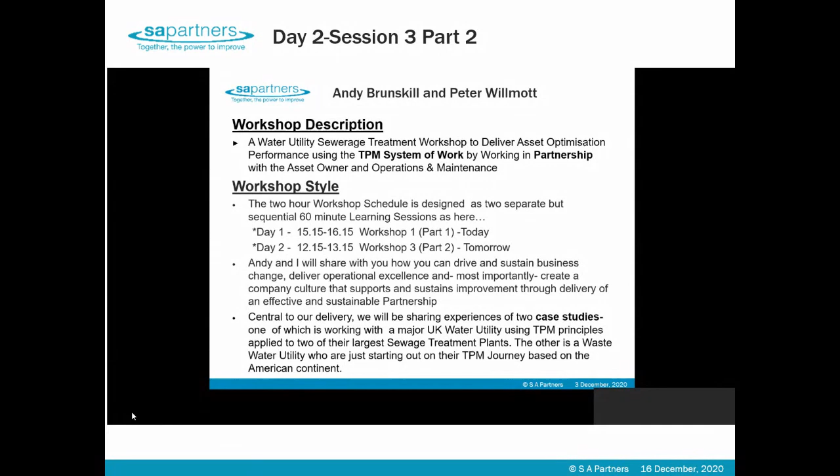This was our agenda over the two days. Let's highlight today's session, day two, where following this brief introduction, we're going to spend about 20 minutes digging deeper into the wastewater utilities case studies.

Then, most importantly, we're going to focus on a further 20 minutes of the hour looking at how you can set about scoping your TPM program in a particular facility, and how you then build in the second part of that session into the key stakeholder buy-in session to the scoping study outputs.

We'll spend the last 6 minutes or so looking at the second exercise of how you align your strategic business drivers, as a takeaway exercise.

We did one yesterday, as those of you who were there know, and we're going to do a second one. Then that leaves us 5 to 7 minutes at the end to look at today's key learning points, final thoughts, and an evaluation of what the workshop has given us.

I'm Rhodri Williams, I'm the operator. I've been working alongside the lean team, and as part of my green belt, we've been doing the GBT belts here at Cog Moors.

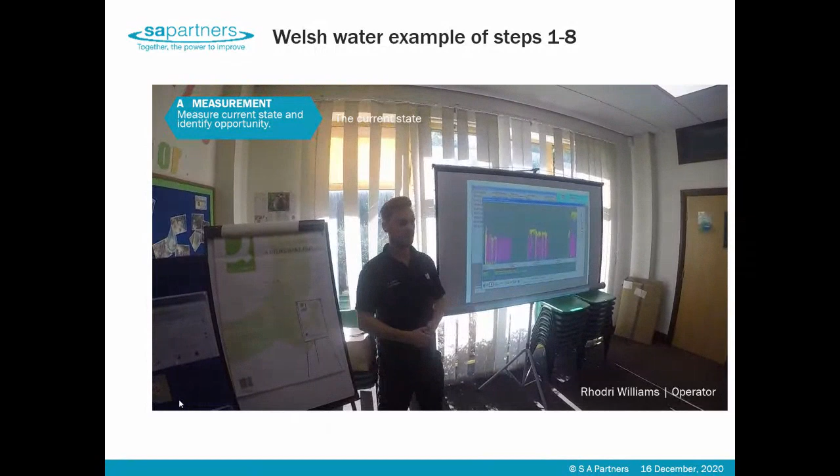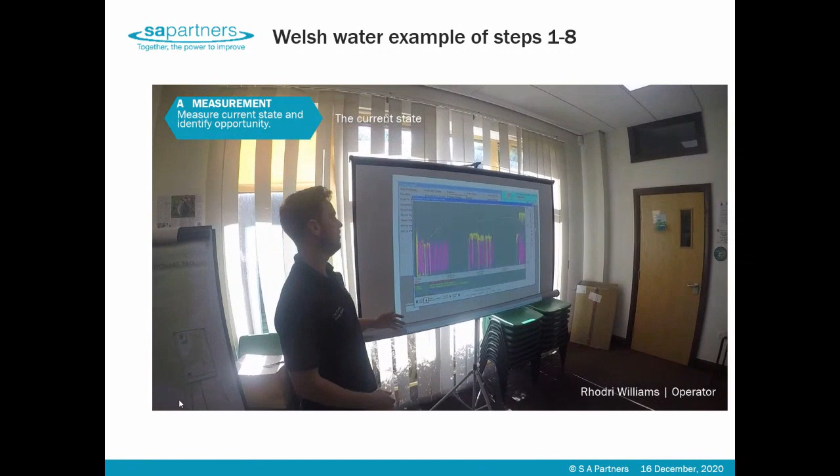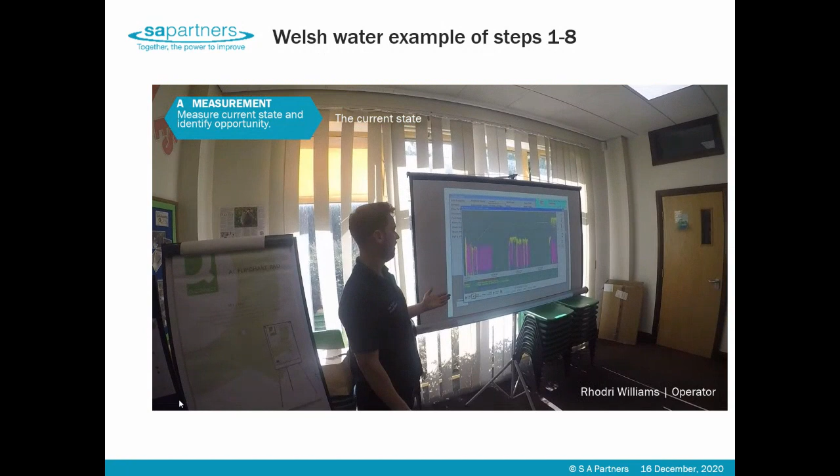The yellow lines are the flow to our thickeners, and the pink lines are the sludge coming over from our primary tanks, which feeds the primary sludge holding tanks. In the previous state, as soon as there's a failure, you see the flow to the GBT stops.

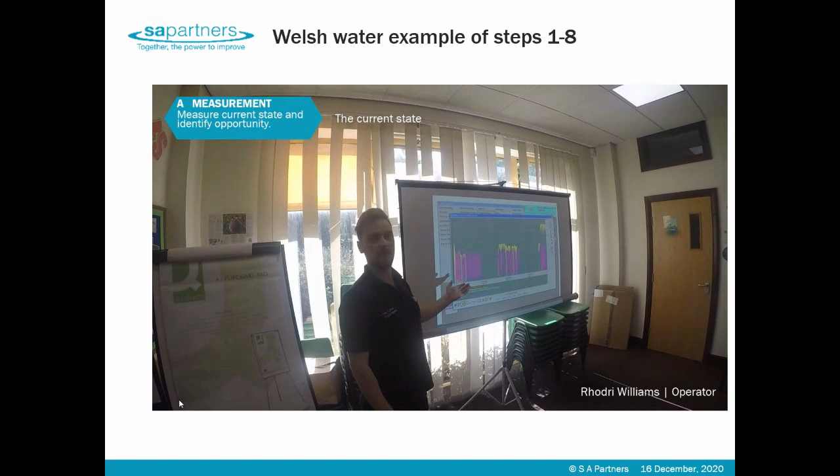As soon as that stops, the tanks fill up. Once the tanks are full, which is the top line up there, it turns the SDM pumps off. While the SDM pumps are off, the sludge is just constantly thickening up in the primary tanks.

We hope to get sludge going onto our belts at about 1.5%. But during a time like this, where the sludge isn't being taken out of the primary tanks due to GBT failures, it's been up over the 4% mark. When it's that high, you can't get it over the belt, so tankers have to come on site.

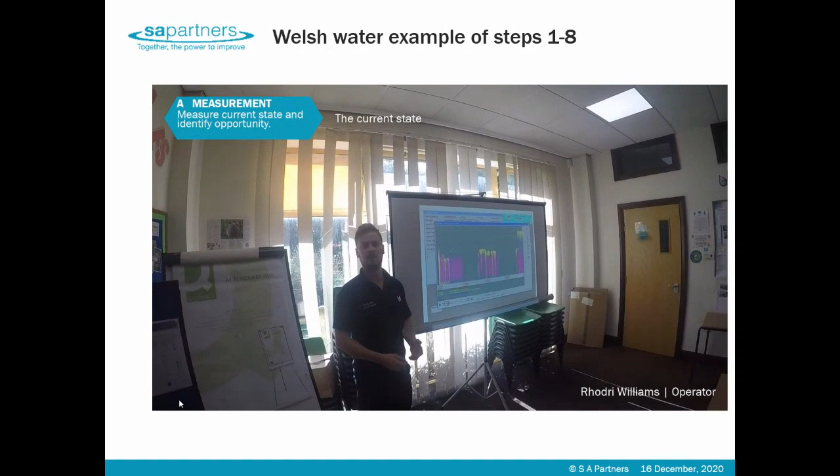I think it's about £1,000 a day. Sometimes we have 2 or 3 tankers going out constantly throughout the day, so it's a large cost.

You can see when we do get the belts up and running again, we might only be up for a few hours, and what happens is we'll leave site after finishing the day's work thinking we've got it sorted. As soon as we leave, the GBTs will fail and the tanks will be full again.

Same process - the sludge will be thickening up in the primary tanks, and coming the next day, first thing in the morning, we'll have issues, and again tankers will have to be called in.

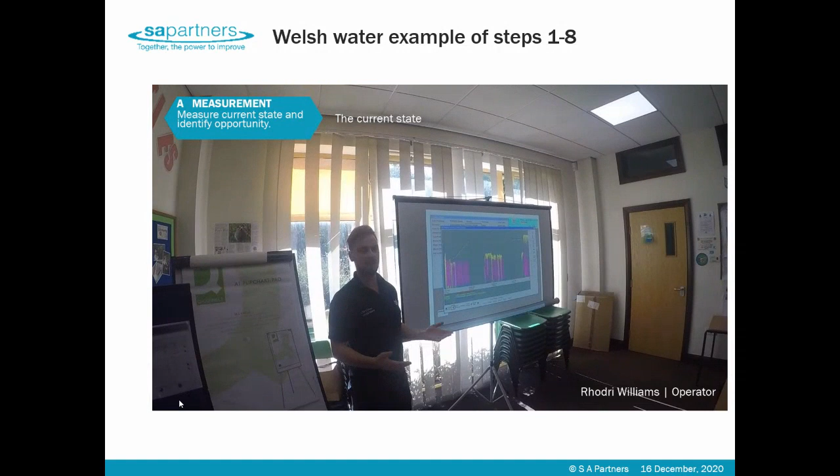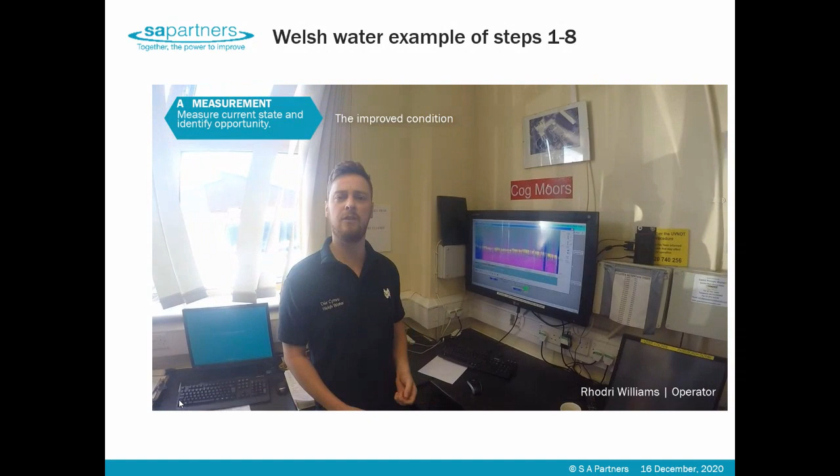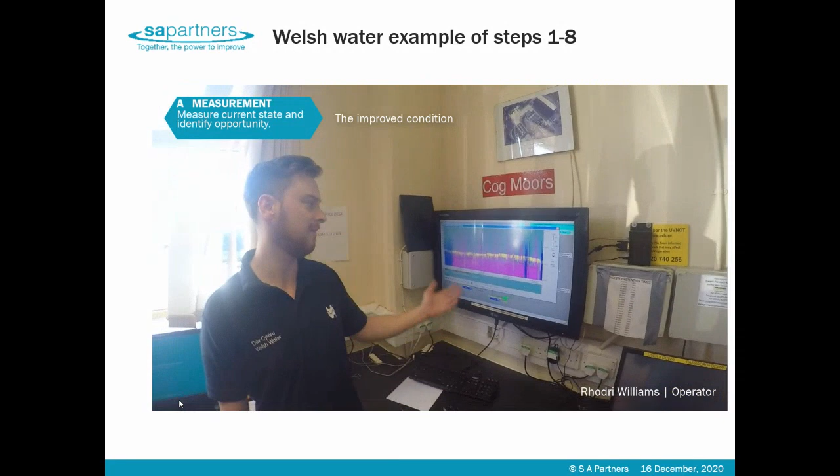So we're currently in the control room here at Cog Moors, looking at current state after a few weeks of running our project. As you can see by the trends, this is live over the past 7 days. We've had constant levels in the tanks, with minor adjustments where the tanks fill up slowly since we haven't been beating it. We adjusted maybe 1 litre and brought it back over a few days instead of running things at 100%, just slowly chipping it down with minor adjustments here and there. We've gone a whole week without breakdown, which was unheard of previously. I think things are looking a lot better, and we just hope it'll carry on.

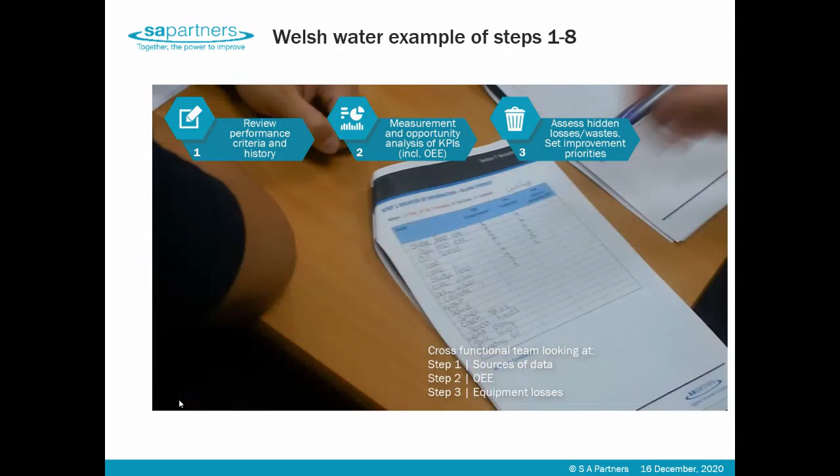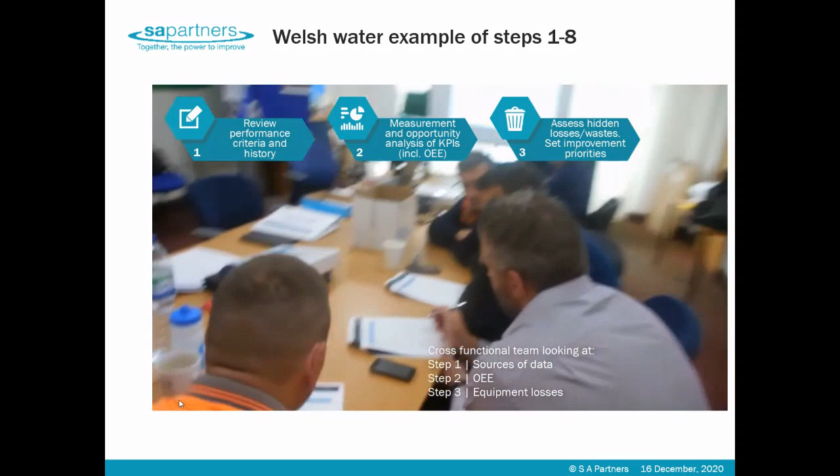Yeah, so that's what you then get before. Yeah, so starting off with, in an ideal situation you can have 3 belts up and running, so if there's any breakdown you can just jump onto the next one. But no.

Hopefully this doesn't work towards the transfer pump? Yeah, transfer pump, where that would have been used.

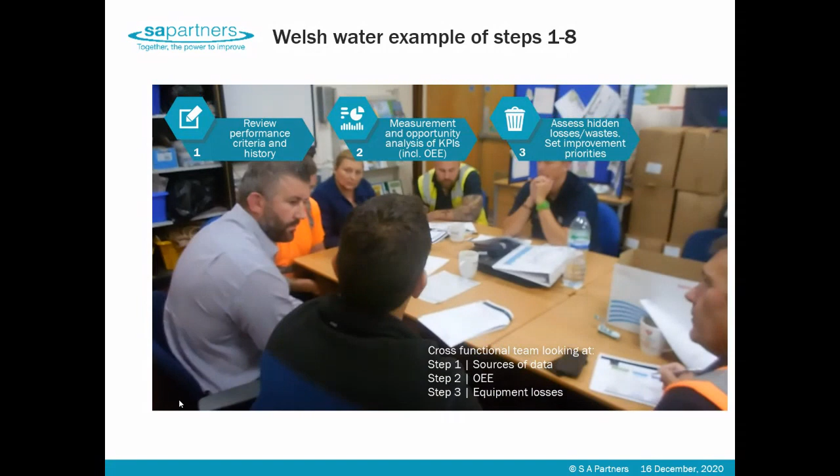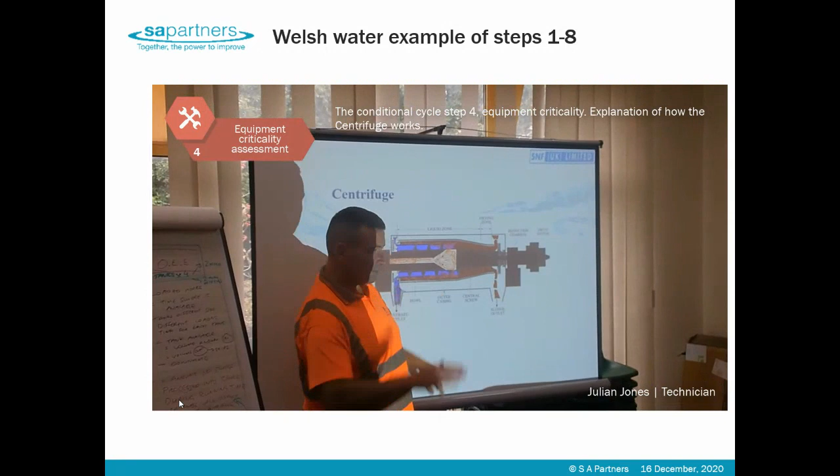The solids come over here, and the centrate comes at the back end.

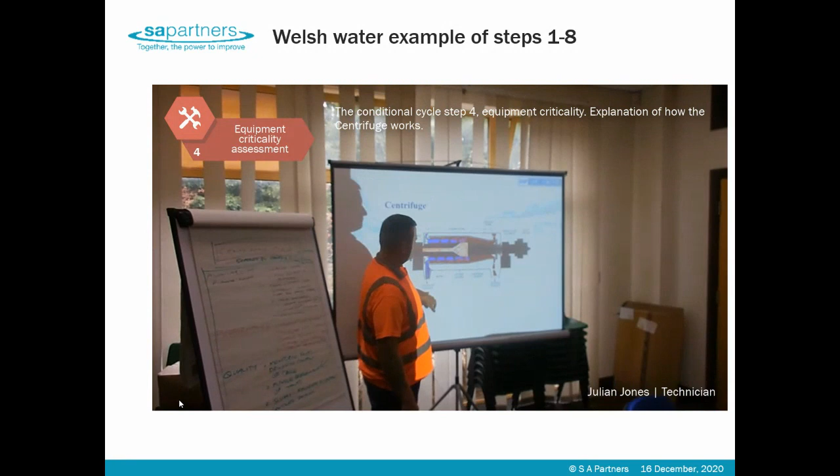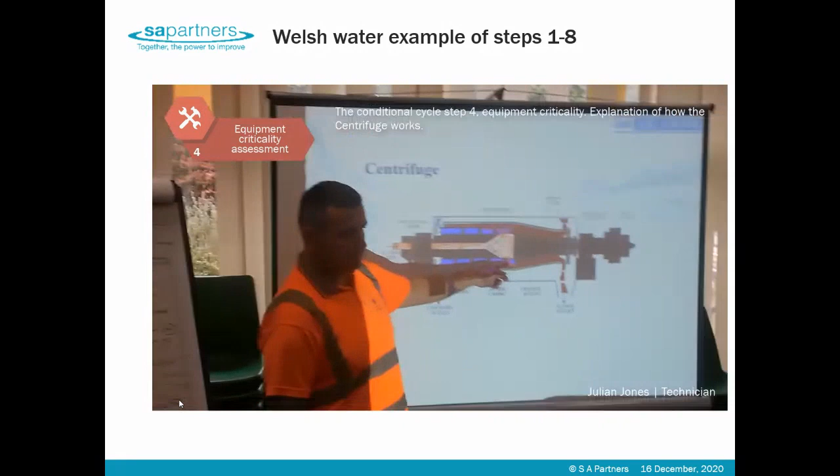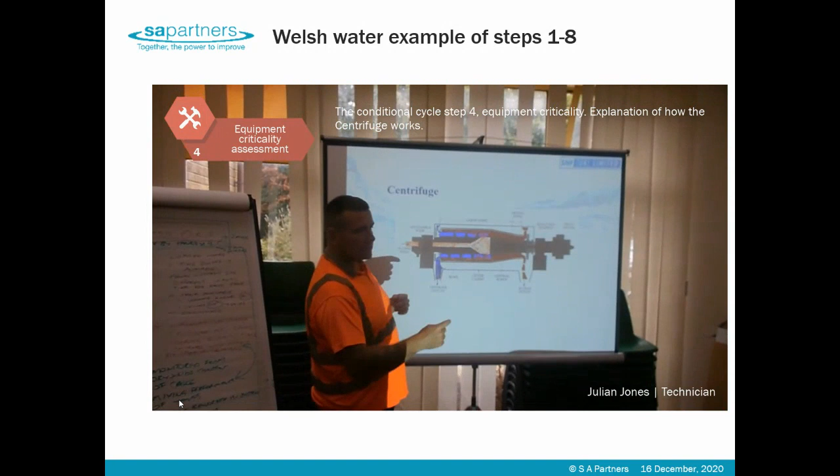So what types of issues do you have with those in particular? Yes - block ports along here, not so much block ports here, but where the scroll is welded into the shaft, there are supposed to be slots that fill up with rag, causing imbalance, and fill up with grit. The ports where the sludge comes out and the centrate comes out get blocked with rag and grit, causing imbalance again. Also, if you make it too dry and overfeed it, it can't get out quick enough. Right, so that's what was happening previously - shoving so much in, it can't get out quick enough. And there's a problem with the conveyor too, isn't there, taking it away? It drops down onto a conveyor which takes it away, but that couldn't move it quick enough. And that was backing up then? That would back up and eventually put more strain on the belts.

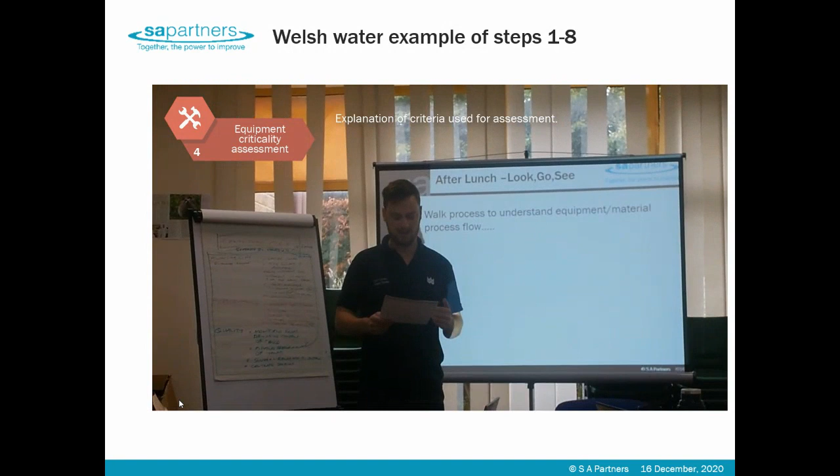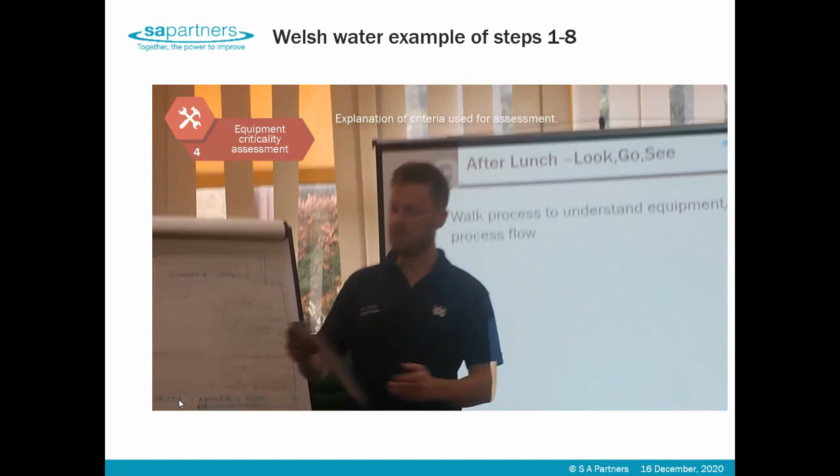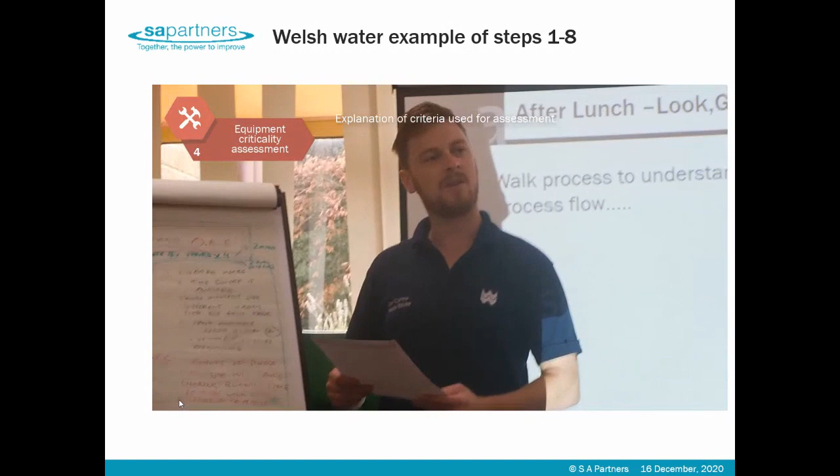Using the criticality assessment, we looked at safety, availability, performance, reliability, maintainability, environment, and cost. Using a form like this, you go through it, and what it does is pick out the worst offender - and it's usually not what you think it is.

It just goes on the floor. The sample point they mentioned was for the drainage - it goes in there but still crosses the path to get to the drain. So look at the drain, it's in the middle of the path, and to get from the sample point to the drain it has to cross the path. So it blocks up. Yeah, because it blocks up. So should we just leave it open?

Just to help you visualize the process here, we have some photos from the start of the TPM journey of the polymer feed area and the gravity belt thickener. You can see the current state of the polymer dosing area, the spillage on the floor, and the number of near misses and accidents as a result of these spillages. The surface is very slippy, and the polymer is leaking from the IBC bag.

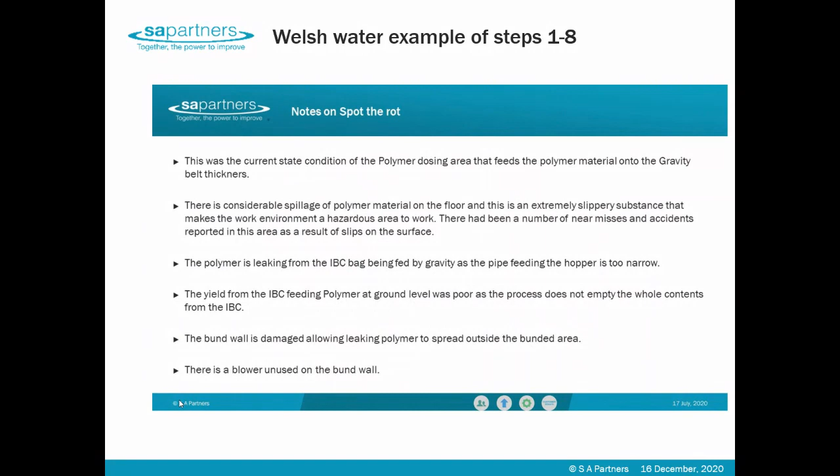The yield from the IBC feeding the polymer at ground level was poor. Here we have the after photos, and here you can see 20 weeks later, a much improved environment.

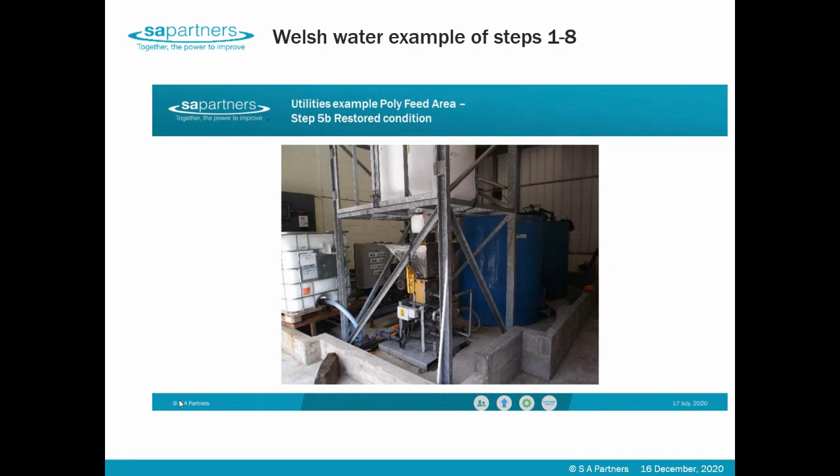The poly spills have been eliminated. The leaks eliminated by changing the diameter. The yield from the IBC bags on the polymer is improved as the IBC bag is now on an incline and empties the whole contents.

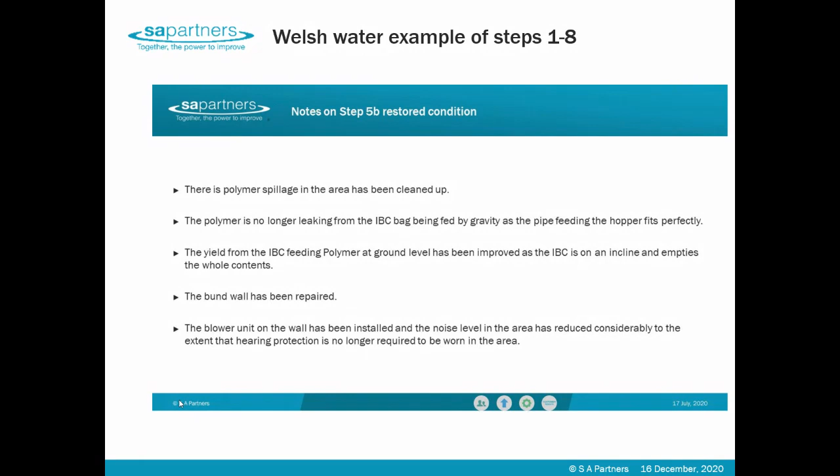The bund wall has been repaired and the blower unit that was previously on the floor has been installed, and the noise level has been reduced considerably to the extent that hearing protection is no longer needed.

So if we just run through the activity board then, we started off on day one looking at the sources of information. So we've got quite a lot of sources of information there. We've looked at how trustworthy the information is, and actually quite pleasingly, we don't have anything there below a 3, so that's pretty good. And we've got quite a lot of 4s and 5s, which means that the quality of the information is very good or excellent.

So that's a good starting place for getting our background data and how it's operating. We could do with some more information on schematics. I think really to look at some of the criticalities further on, we really do need to break down that schematic. So somebody needs to go away and find that schematic.

I'm looking at Roger here now. Have a word with Sean and see if we can find the detailed schematic for the centrifuge and for any other bits of equipment within the area that are quite crucial to this. I don't know whether there might be schematics for poly makeup and that sort of thing as well.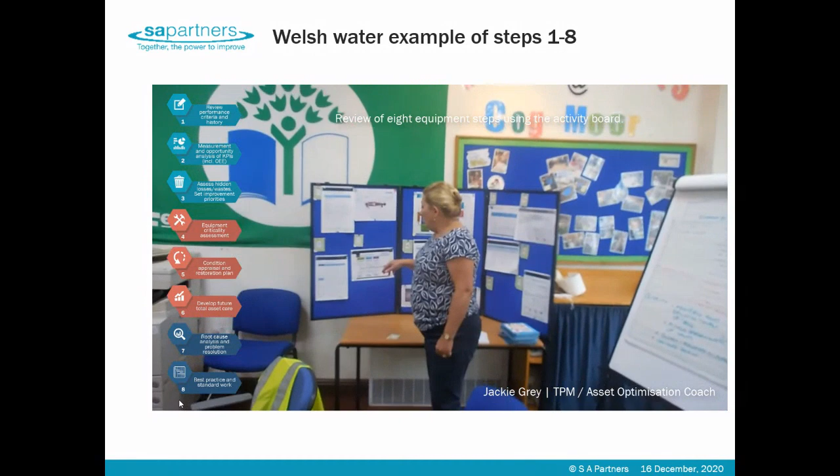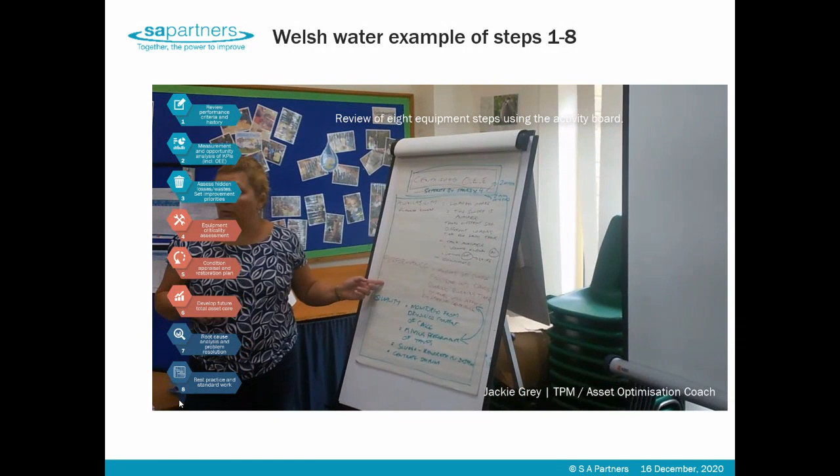Okay, so we did some really good work on the OEE. This is really good. We do need to put a lot of thought into how we calculate this so it means something to us, and so that we can come up with a template that actually reflects what we're going to do in the other parts of the business when we roll this out. So it's really important that we get this right and we make it meaningful.

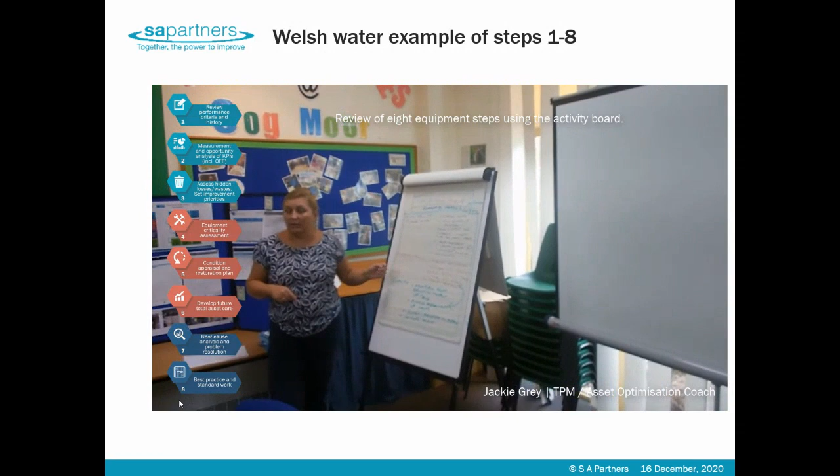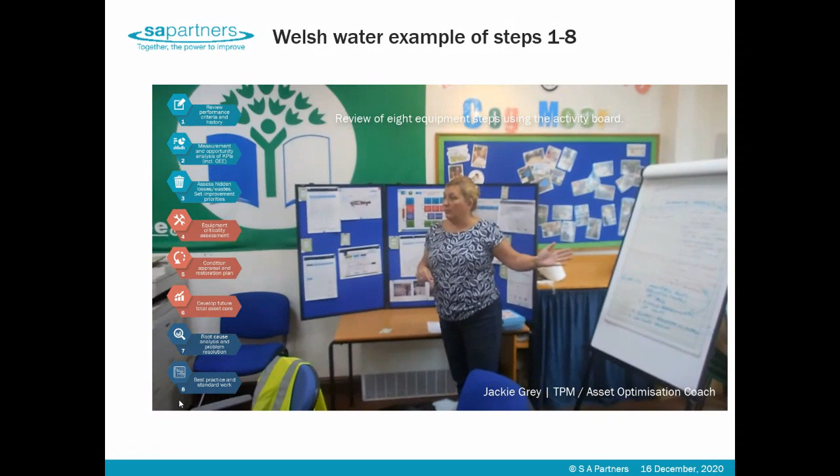So I know you're going to review that now, and we'll have a look at that when we see you next Thursday, won't we? And we'll try and work that template. And then we'll probably put 4 weeks of data into it and see what it looks like, and then review it again as a group and work with it for a few weeks to see if we're happy with how we're calculating it. Okay? And we'll be doing that on the GBT figures first, and then we'll try it on the centrifuge figures, but we'll do GBTs to trial it, okay?

So we looked at the losses in stage 3, and that gives the basis to see where we can find some of the wastes within the process and where we can make improvements.

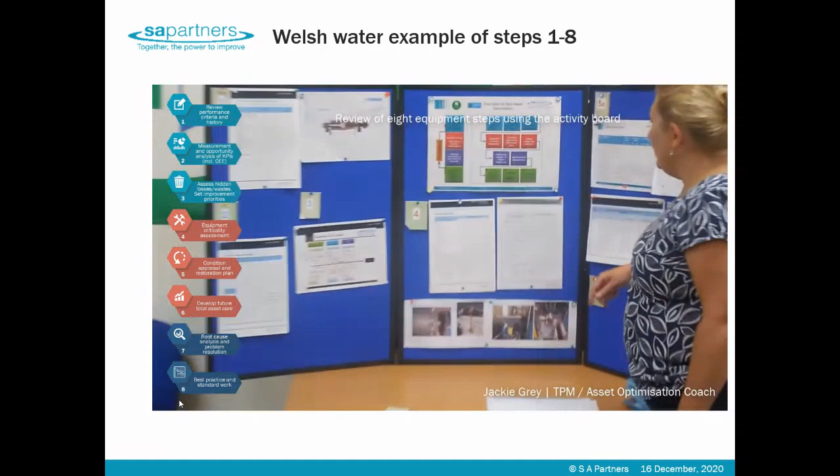And then we went on to criticality assessment. The criticality assessment is pretty detailed, really pleased with that. We get some quite high scores on there, so maybe the poly system, I think there's quite a lot of work that can be done with that.

And Matt very kindly said that he would look into finding what we could have in a way of a self-contained poly unit and looking at the cost of that, because there may be some funding available, especially if it is a mobile unit that if we have changes to the site we could utilise elsewhere. I think we've got more credibility for actually having it in the short term if it's a mobile unit that could be utilised elsewhere on other sites.

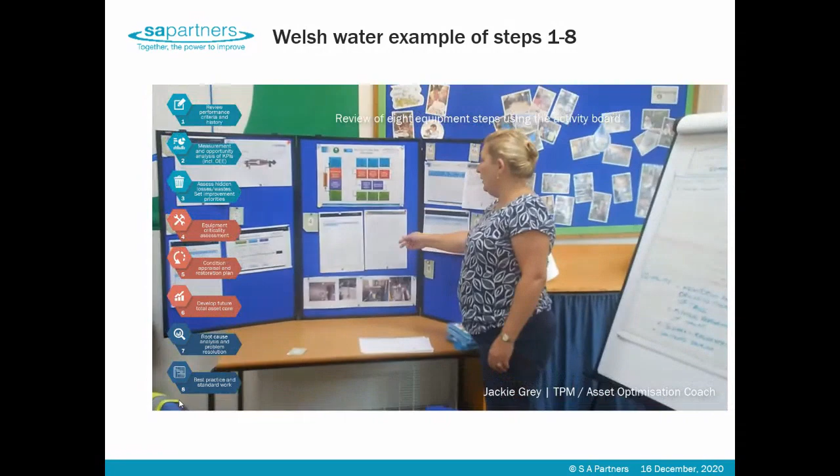I'd rather we focused on finishing the asset optimisation on the GBTs first. But if there is something in there that while you're doing repair, you've got to clear it up anyway, or you've got something that you could do at the same time, obviously try and pick up the quick wins in there as we go along.

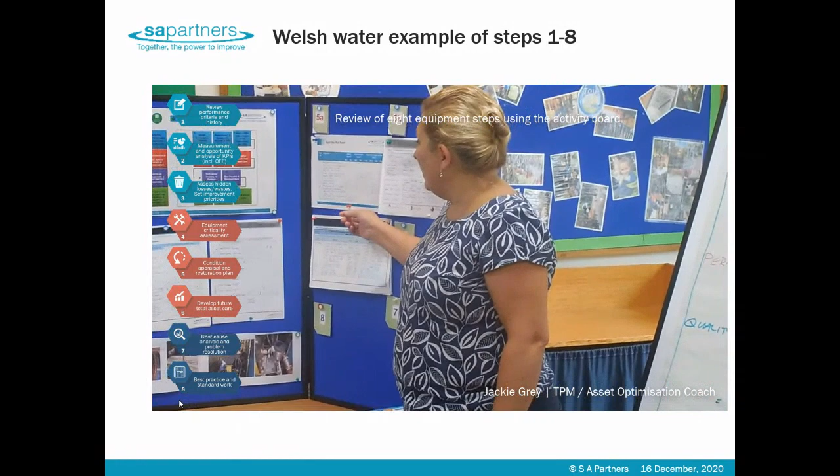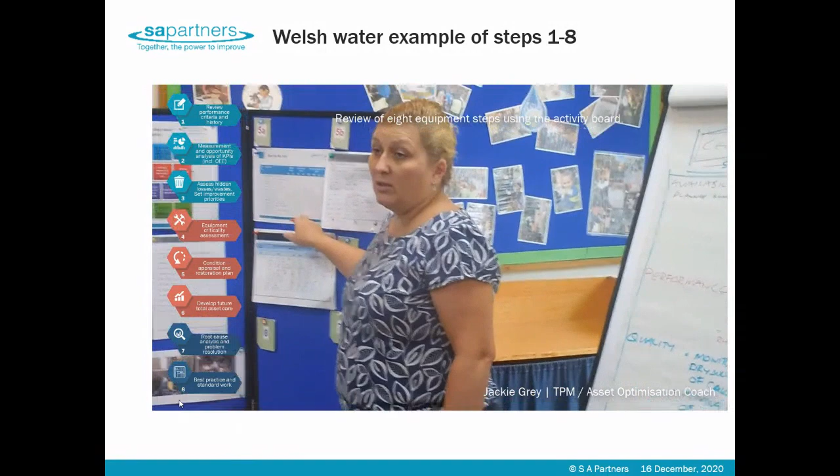There's quite a bit of work in there to get that right. We'll have a Tidy Tuesday, hopefully next Tuesday, maybe make a start on that. It's not literally a quick half hour in the GBT area to get it back to as it was, and there's a few boxes in there that could do with getting back to the state it was. But that's more than one Tidy Tuesday there - with a few bodies in there, we might be able to make an impact on it.

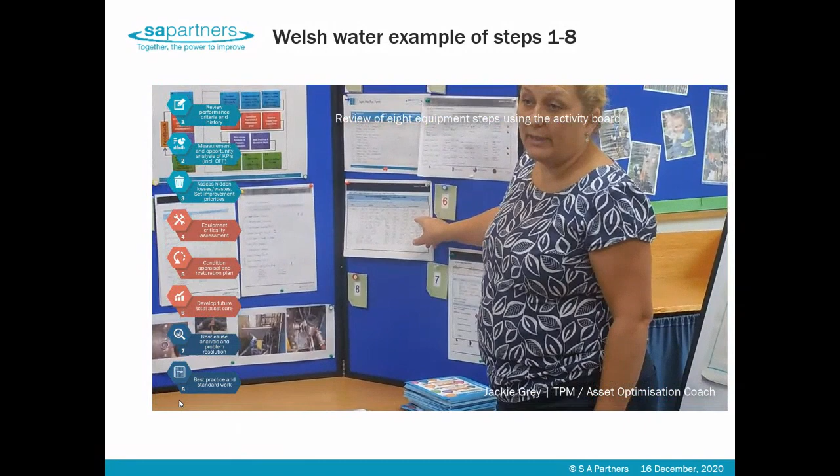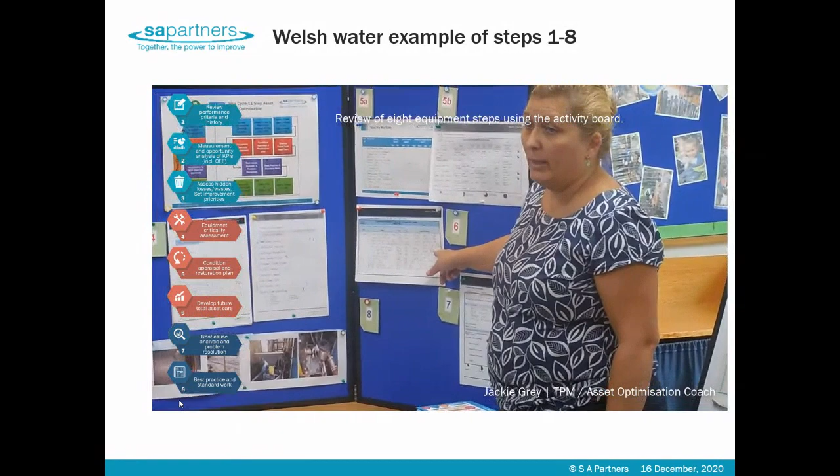We've also gone on to the total asset care. There's lots of checks that could be done, and some of them are being done, some aren't. These are the things we need to iron out and implement before we get that refurbished centrifuge back into service. As soon as that goes back into service, we need to make sure the asset care we're doing can be controlled to minimise the impact of any breakdowns or blockages as much as we can.

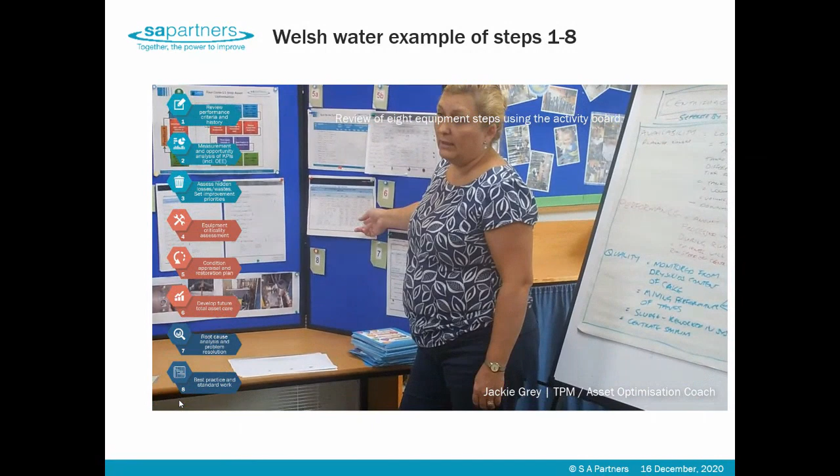Obviously we can't do anything about the rag coming through the system with the strain press, but you've already identified things within this process to minimise the actual blockages - by reducing the flow, keeping it running as much as it can, and by making sure that cleaning cycle is actually run, forcing that cleaning cycle before it all becomes too dry and hard.

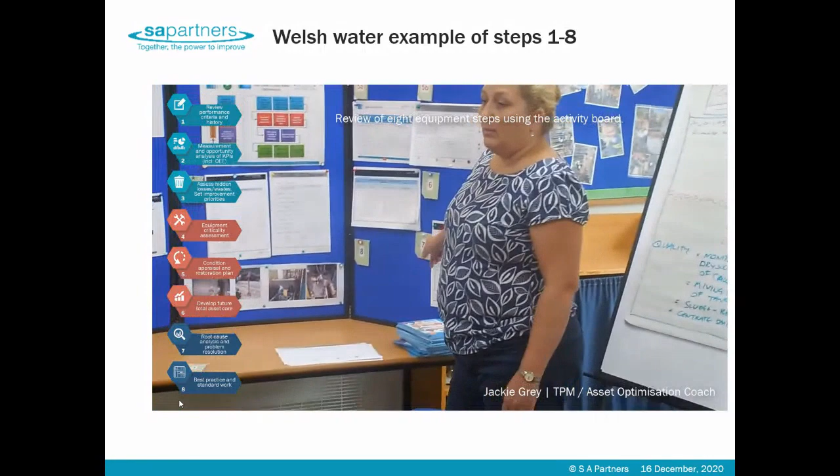Then we went on to the final step, looking at standard operating procedures, and talked about the two types of SOPs. We call them SOPs within the business, but really within this process you've got standard operating asset care, and standard operating procedures, which will cover how you operate the asset to its optimum.

So I think to cut down on the bulk, we should have a quick reference guide. Now we understand how we need to run the GBTs and the centrifuges to the spec they were designed, we have quick reference asset care SOPs, and quick reference asset operation SOPs that say, depending on the thickness coming in and the tank levels, the different ways you run that piece of equipment.

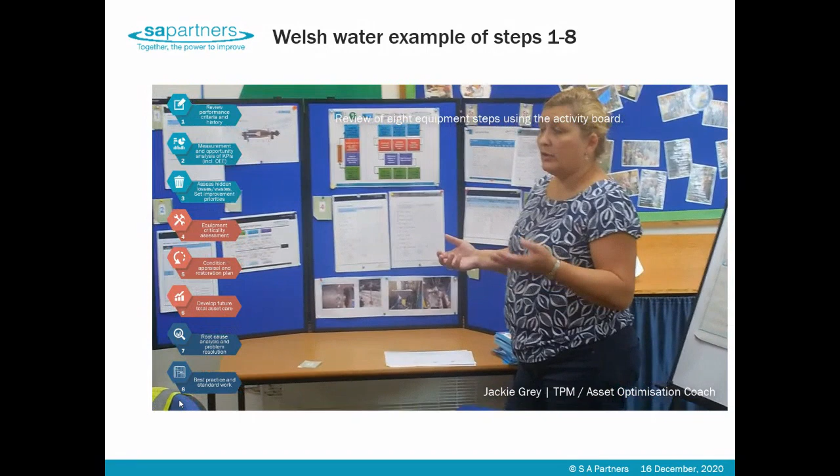From an audit and review process, the team progressively worked through four maturity milestones: introduction, refine best practice and standardise, building capability, and striving for zero losses. There's some audits against each of those - 1A, 1B, 2A, 2B, etc.

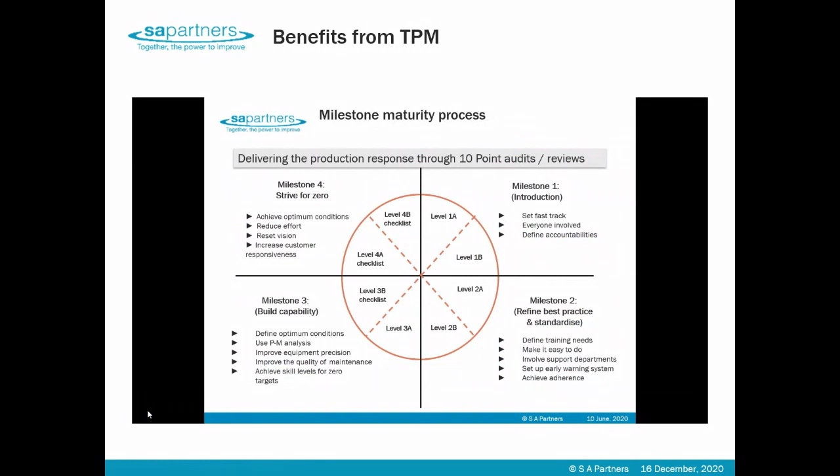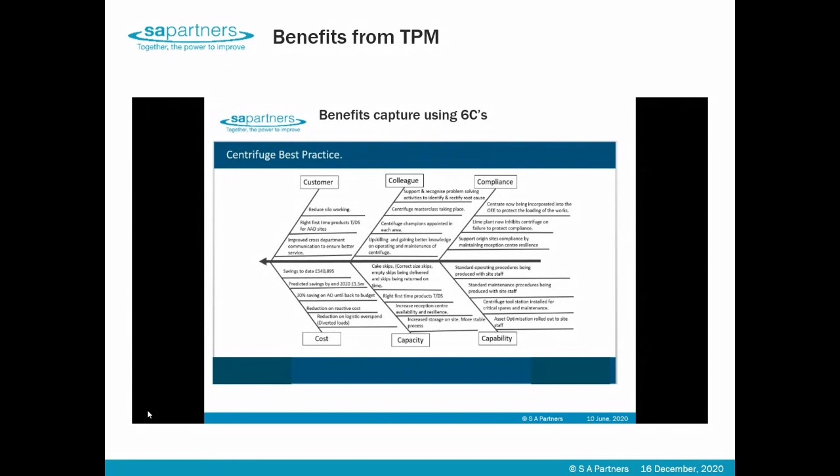One of the other things we've done - this is an example of what the guys have done - is capturing the benefits, using the 6 C's: customer, colleague, compliance, cost, capacity, capability. What are the benefits of the work that's been done? If we look at some of those benefits from a financial point of view, as well as the culture and development of people, this is an interesting one - the benefits of AO and the centrifuges.

Interestingly enough, manual interventions reduced by 15%. Consistent cake, which means basically we've got fewer skips, which is less cost in terms of transport because the cake is at the right specification. Reduced poly consumption in a safer environment.

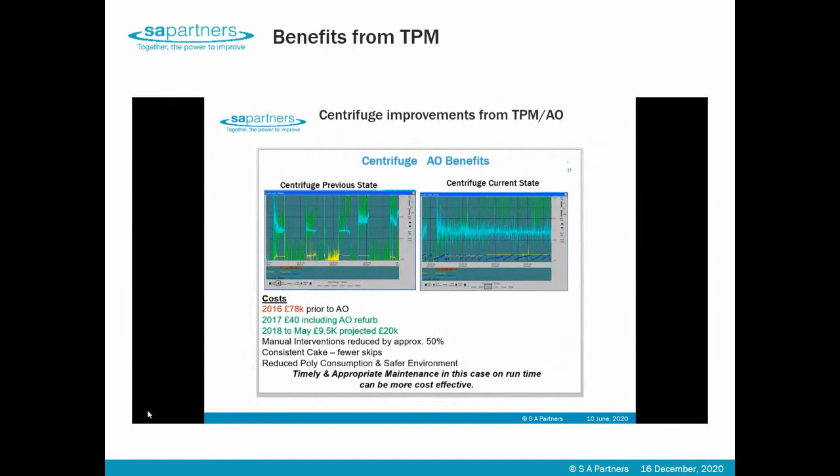And if you translate that - the company's got 47 centrifuges across 30 sites. They set a target of 15k per centrifuge. They've saved 300k to date, and the target is to hit 1.5 million by the end of next year.

If we look at these things called primary settlement tanks, again similar sort of figures - these are the breakdown costs. In 2018, compare that to 15 and 16: 20k, and no breakdowns in the last 22 months, and zero costs for having to bring tankers in to empty the vessels out.

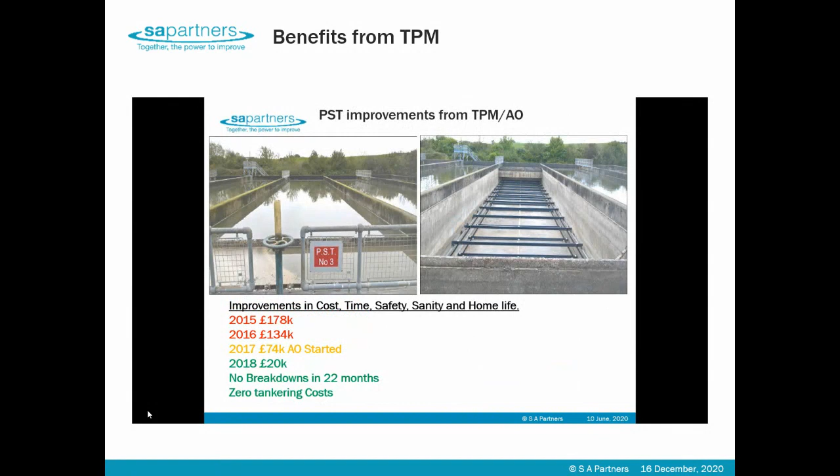And if we look at the belt thickener - improved performance by 33%, running at improved speed, and a 60% improvement in the dry solids. So quite significant results there.

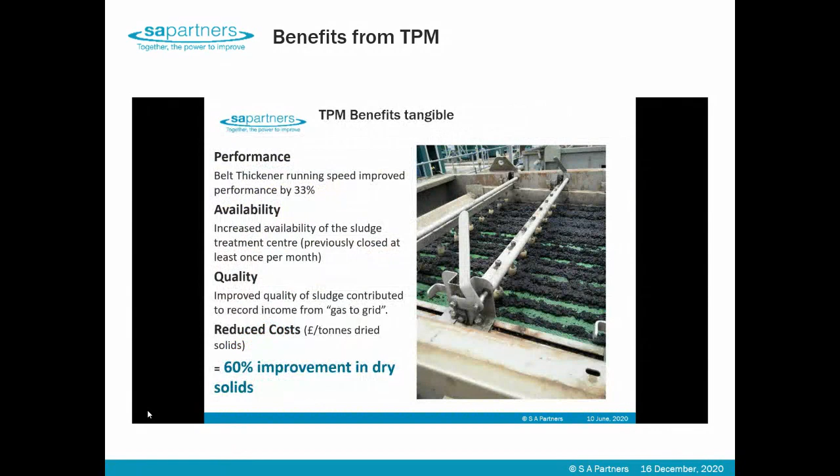We now move on to how we should set about scoping your own TPM program within your water utility and what the implications of that scoping study might be.

We can express TPM as an enabling system and philosophy for delivering operational excellence under the 3 Ps: first, purpose, how customer needs are understood and converted into strategy; second, process, how value is created within the organization; and third, people, how people are trained, upskilled and managed, all focusing on customer results.

Let's look at each in turn. Our systems model of TPM has a purpose, where our program is applied via a defined introductory and deployment process within the utility's business unit. The process is our 11-step model applied through a defined sequence of team-based learning by doing. The outputs of this application are aligned to an evidence-based assessment process linked to the team's progress through our model, the people emphasis.

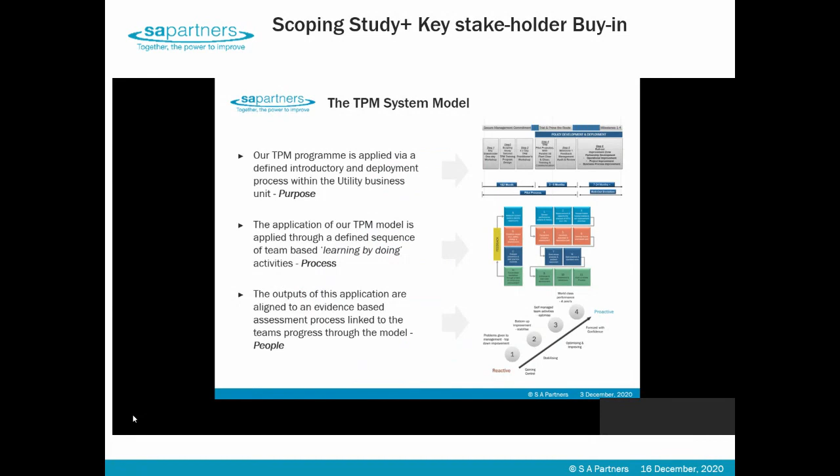Let's look at each in turn. The purpose has 6 steps as a training implementation process. The first 3 steps are concerned with securing management commitment before we then develop the policy and how it's deployed.

By trialing and proving the route across 4 milestones, 1 to 4, comprising steps 4, 5, and 6. The timescales across the bottom are indicative, not absolute, but the first 3 steps of scoping, preparation and tailoring suit our own TPM training program, with the essential step 2 key stakeholder 1-day buy-in session of those scoping study outputs, before we then launch into a 4-day TPM practitioners training workshop.

Those typical timescales across the bottom would take the first couple of months, and then months 3 to 6 could typically be step 4, rolling out or starting on a TPM pilot project and achieving milestone 1, before we go into rollout over the following 2 years and beyond. So there's a pilot process followed by the rollout evolution.

Let's dig deeper into each one of these. Our 4-cycle, 11-step TPM enabling process follows this measurement cycle, condition cycle, problem prevention cycle and sustainment cycle. The first 8 steps, as we explored yesterday, are the equipment-based steps, comprising the measurement, the condition, and the problem prevention and elimination.

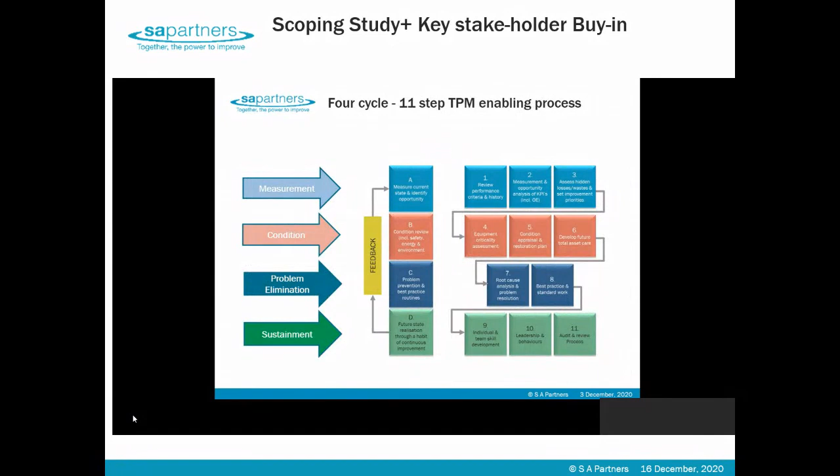And the ownership journey, the people aspects, takes us through 4 levels or 4 milestones, where we move from bottom left, reactive, where we gain control, stabilize our processes in the utility, optimize and then improve those processes so that we can then forecast with confidence and become totally proactive.

Classically, what we find up until milestone 1, problems are given to management with top-down improvement, before the TPM process is able to start and push the bottom-up improvement when we're stabilizing towards self-managed team activities, optimizing, where we can strive to hit the 4 zeros that we set right at the very beginning.

And those 4 zeros are typically zero accidents, because people do not come to work to get injured, zero breakdowns, zero defects, and zero operator interventions, if we want to be truly world-class and be able to forecast the future with confidence.

We also have defined evidence-based audit review criteria at each of those 4 maturity levels, where we move from reactive, proactive, excellent across those 4 levels. And those audit review processes, which are very detailed and evidence-based, are passed over to the local CI TPM teams over an agreed time frame.

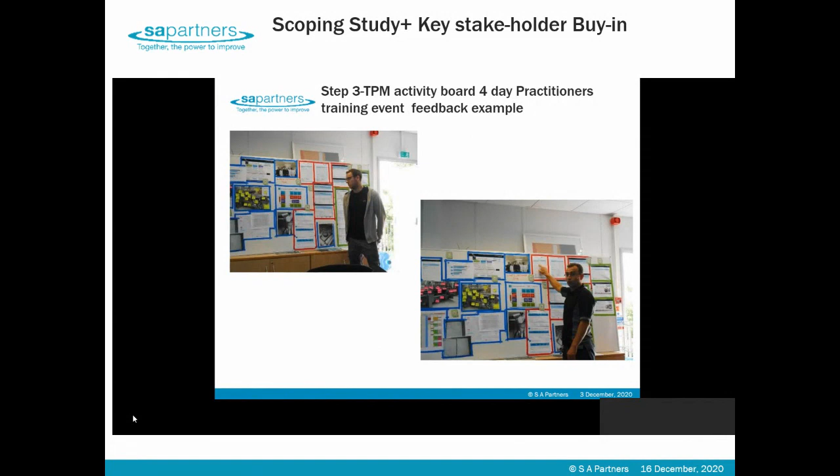So just to summarize that bit and emphasize 4 to 6, having covered the first 3: it's a journey where our capability improves over 2 years minimum, but 3 to 5 years in bigger plants. We go from an initial pilot to improve the process, getting everyone involved to reach milestone 1. Then in milestone 2 we refine the best practices and standardize them, in other words getting the basics right. At milestone 3 we build capability and people become really innovative because we're tapping into their minds of gold. Eventually at milestone 4, those 4 zeros we strive for from the beginning—0 accidents, 0 defects, 0 breakdowns, and 0 interventions—actually become a reality, and we achieve the spark to start vision we set at the very beginning.

What's going on over that period in terms of input, ownership and responsibility is shown in the bottom part, where the TPM facilitators pass over their learned know-how to the maintainers and operators team, working as the asset owners. Supervisors, forepersons and superintendents and managers become coaches, but the manager's real job is as champions—a phrase we'll explain later—and the leadership team is definitely the proactive sponsor of this process.

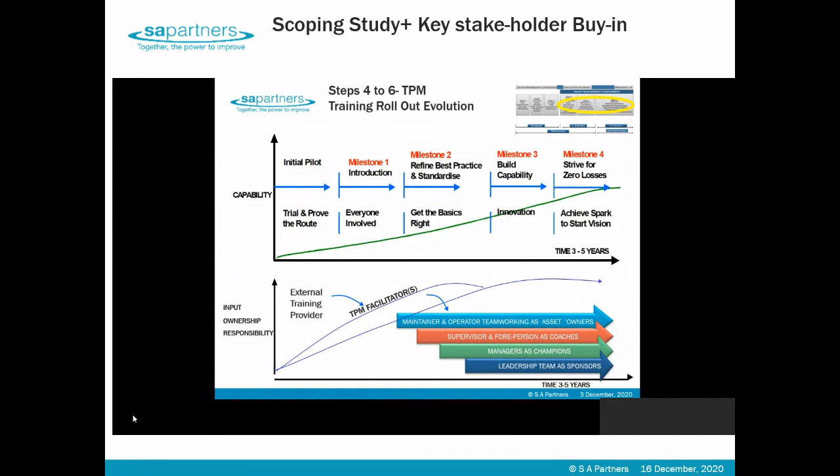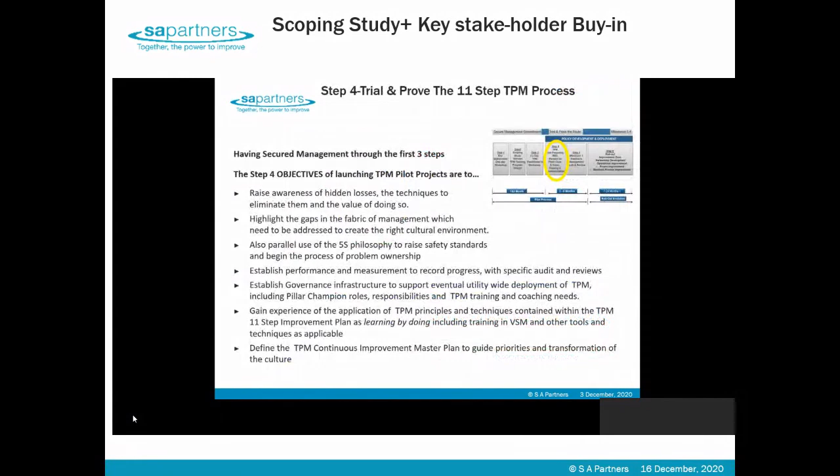So step 4, when we move into policy deployment, taking those first 3 steps learning, where we trial and prove the 11-step process, having secured management commitment, the objectives of launching the real pilot project over 26 weeks can be summarized as: raise awareness of the hidden losses, the techniques to eliminate them and the value of doing so, and highlight gaps in the fabric of management which need to be addressed to create the right cultural environment. This affects everyone, and we all need to change the way we do things here.

There's parallel use of the 5S philosophy to raise safety standards and begin the process of problem ownership. Performance is measured to record progress with specific evidence-based audits and reviews. And we put the governance structure in place so that the eventual utility-wide deployment of TPM has the underpinning support of pillar champions—we'll explain that phrase later—responsibilities, and training and coaching needs.

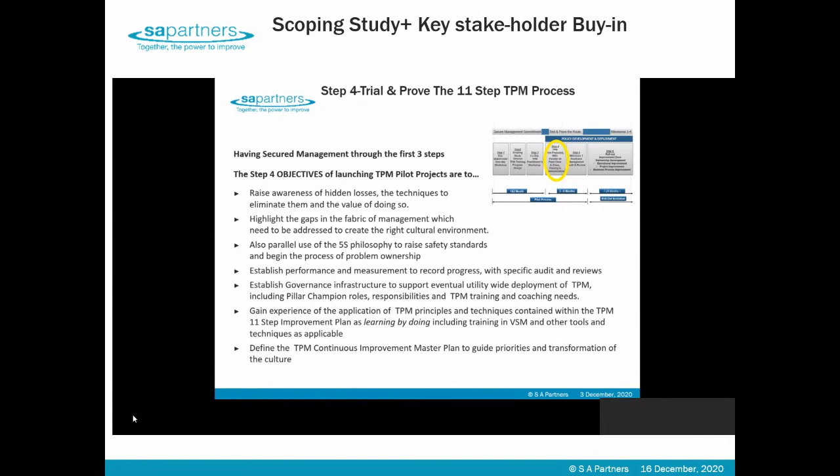We gain experience applying the principles and techniques contained within that 11-step improvement plan, our foothold, moving from learning by understanding to learning by doing on the plant, including other training and tools as appropriate. We're actually defining the continuous improvement master plan during this period to provide priorities and transformation of that culture.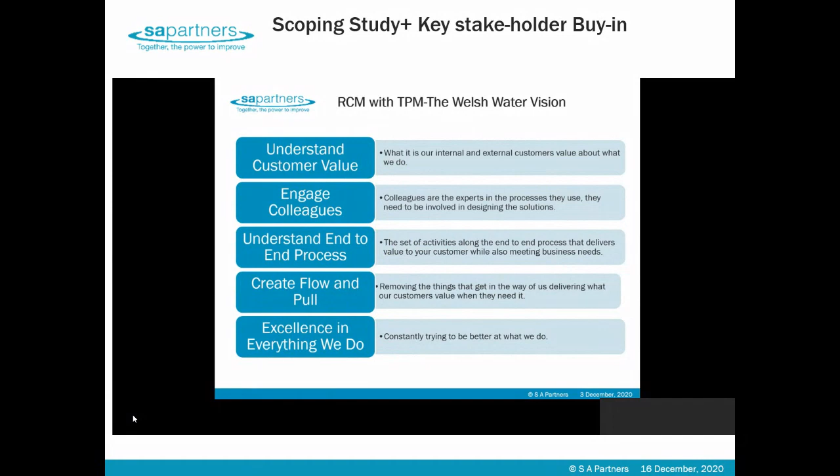If we look at that in terms of the Welsh Water vision, they had been doing reliability-centered maintenance for some years before TPM was introduced 2 or 3 years ago, not instead of, but to build on that, driven by these five behaviors.

As part of lean principles: to understand customer value, to engage colleagues, which is why that one's highlighted, to understand end-to-end processes, to create flow and pull, and to be excellent in everything we do, constantly trying to be better at what we do.

A very simple definition of continuous improvement says what's good enough today is not going to be good enough tomorrow, so we have to take it on board. So the training plan that comes out of that is based on encouraging effective partnerships, as we described earlier today, to continue to flourish and grow within a continuous improvement environment, and a culture of involvement through ownership of outcomes.

There's the 11-step process again, just to remind ourselves. We go through the 8 equipment steps because we want to, A, measure current state and identify opportunity, and B, review the condition of that asset, including safety, energy, and environmental issues.

In step 5, the condition appraisal is in two parts and is often affectionately called spot the rot, before we restore it to as new, and so on. Then we have C, the problem prevention cycle and best practice routines of standard work.

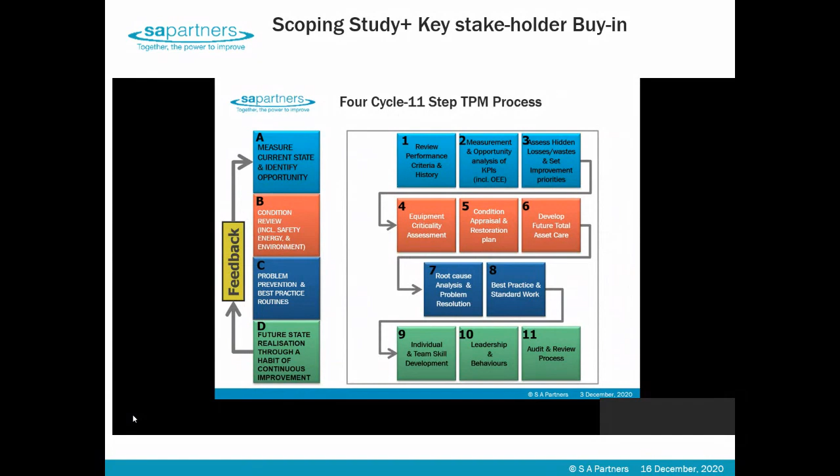Then to realize that future state, D, is a habit of continuous improvement, where we've got the 3 soft non-equipment issues of individual and team skill development, leadership and behaviors, and audit and review processes.

So coming back, let's look in more detail now on what a scoping study really means. That is immediately followed by the key stakeholder buy-in, a 1-day buy-in session to the scoping study output. That second step is non-optional, must be done.

So let's look at what the scoping study sets out to do. Again, this is very busy, but the objectives of the plant-specific study are to look at those things by fully specifying the implementation training plans to cover all of those aspects.

The pilot application, the likely benefits, the shift logistics, how are we going to do this, the team sizes, the membership - this is about obsessive attention to detail, plus the resourcing costs.

Who are these key contact pillar champions? What's the initial awareness, communication, and training plan actually in terms of its timing? And what facilitators do we need to support those requirements and their training and those pillar champions and so on?

We also put very much in this a cultural maturity assessment of people's perceptions and readiness for the TPM training program, to know what the challenges are going to be, and what the good bits are about working for your company, and the not so good bits.

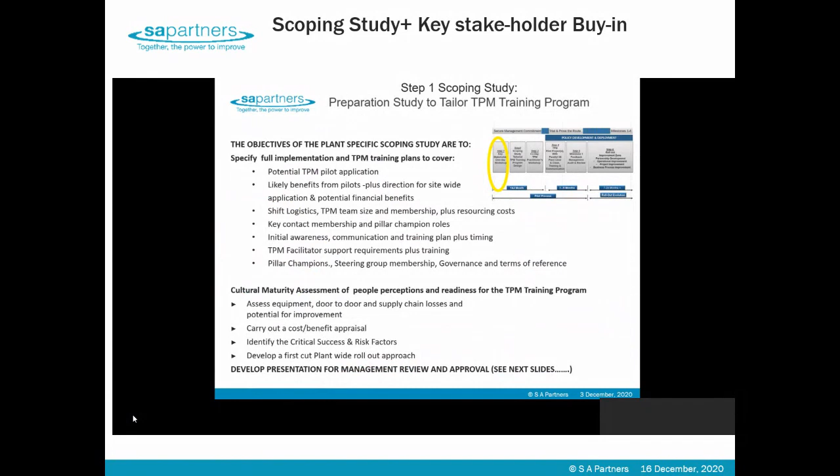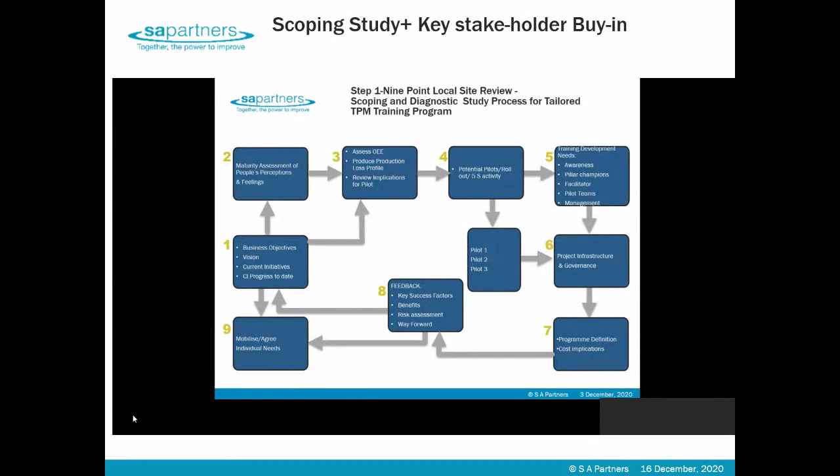And the process we've gone through in that week is shown here. Step one, we all need to understand what the business objectives are now, what the vision is now, and those current initiatives.

What's going on TPM to fit with that, and what's the progress of continuous improvement? We're then also going to do a maturity assessment of people's perceptions and feelings by taking them through 28 statements on a one-to-one basis. We're also going to do a detailed assessment of the OEE through a production loss profile or operations loss profile and review the implications of what that will be for the pilot, because we need to identify the pilots and whether it's 1, 2, 3 or 4 pilots.

And so we can come up with the training development needs of awareness, pillar champions, facilitator, and management and pilot teams. And therefore we can design the project infrastructure and the governance system and define the program definition and the cost implications of this over the next 2 or 3 years, because that needs to feed back into number 8: what are the key success factors, the benefits, the risk assessment, and way forward? So the leadership team can agree to mobilize and agree those individual requirements, making sure it fits the business objectives.

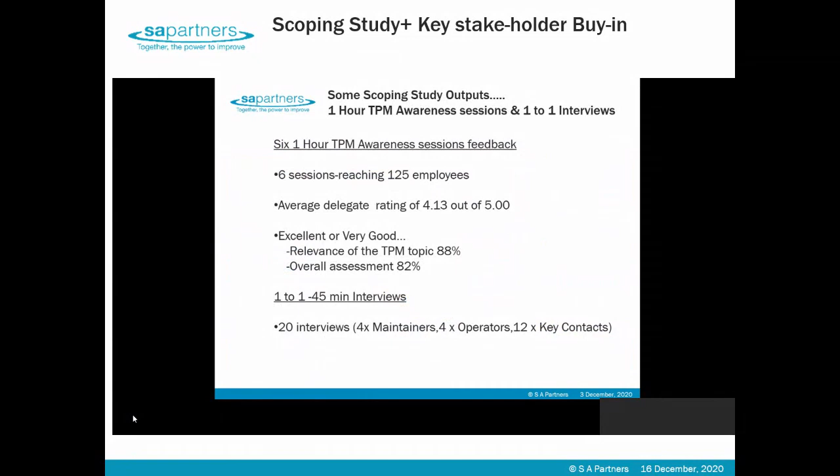And we also carried out 20 45-minute interviews on a one-to-one basis doing these 28 perceptions that covered 4 maintainers, 4 operators, and 12 key contacts and managers. So there's where the score for the feedback of the detail of the awareness sessions.

Moving on. Some of the comments that came out of those awareness sessions are shown here from the floor, as it were, a sample of the comments. I think the approach is spot on and hope everything gets fixed. We've currently too many problems. I really like this and believe we can go for it.

So we're preconditioning people, raising expectations in order that we can all deliver. We need to deliver the training at an achievable pace to build on our capability. It was good debate towards the end of the session and an excellent review because it's provoked honest discussion.

So we also, during the course of that week, carried out a maintenance self-assessment exercise, which is ranking 10 statements here. And the individual delegates and some of the awareness groups do that from the perspective of their work area and adding up their score on a scale of 3, 2, 1, 0, maximum of 30. And those statements, which is really difficult to see on here, but it's an honesty check.

I'm not going to read them all to you, but the first one says, our plant, machines and equipment may not be fit for our current and future process production demands. Do you think that statement is very true, or you strongly agree, you'd give it a 3. If you think it's true, agree, give it a 2. If you think it's partially true or agree, 1. Or if you think it's false or disagree, give it none, 0. So just pick one more.

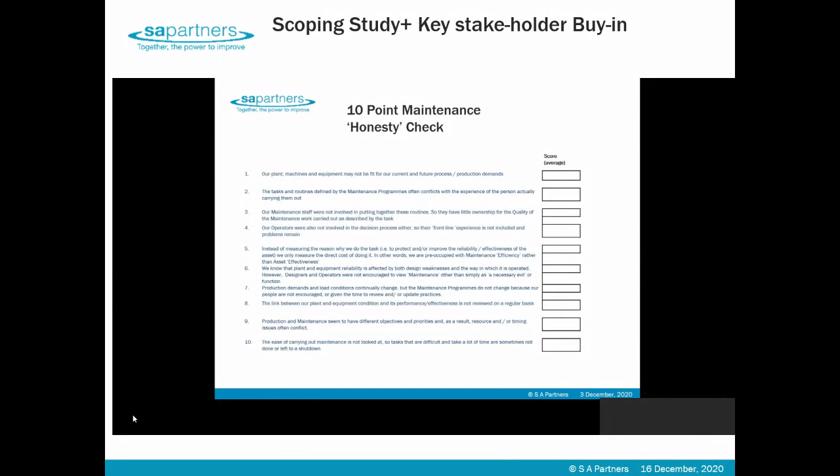40 during the week, honesty checks, sometimes in single groups, sometimes with 6 people in the group. And the range of the scores on that scale is shown there. And the average score was 23, which suggests they've a major opportunity for improvement.

But 15 of them think we have a significant scope for improvement, but really good, honest recognition. There were none in the 5 to 11 where we're doing well, but can still gain some benefits. And there were none in the 1 to 4 where we're almost world class. And thankfully, nobody was delusional and said we're the world's best.

Now, the point is that TPM addresses each one of these 10 fundamental reasons for gaps in our existing maintenance, recognizes that it's the person carrying out those tasks who's the key, and the way in which he or she is supported to achieve true cost effectiveness. So a vital bit of output for us, because if you do that again 3 years into your program, you'll find that most of those 21s to 30s are in the 12 to 20s.

There'll be a lot in the 5 to 11, and a few in the 1 to 4. It's a way of measuring maturity on that aspect.

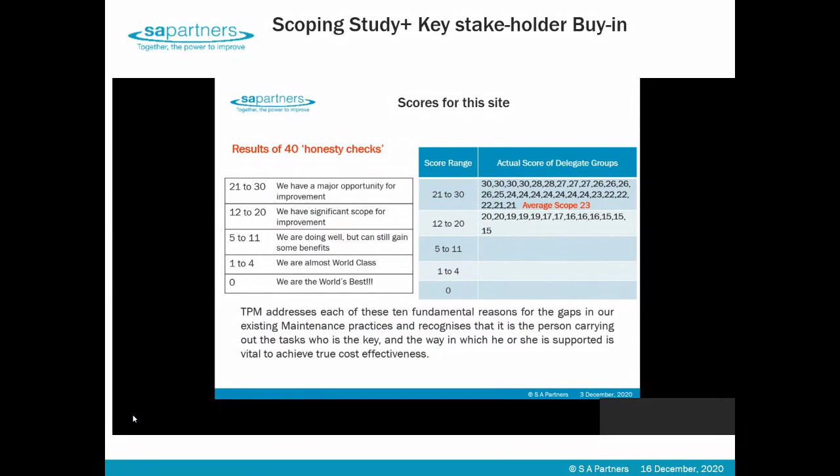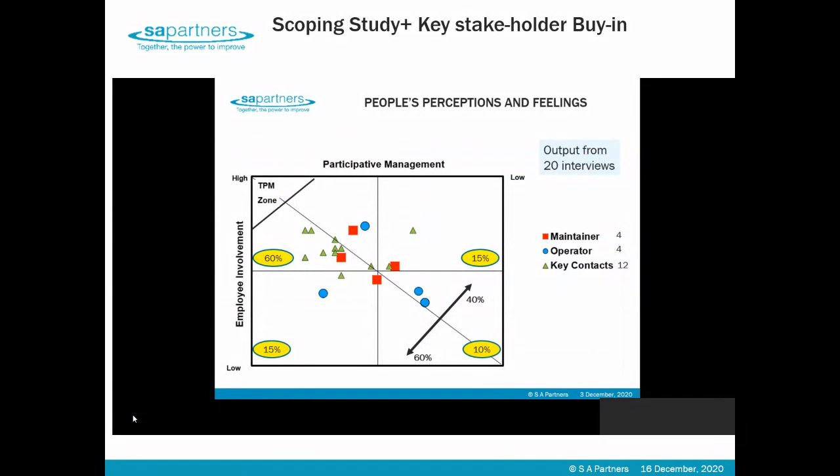The other 15 and 15 are there, and the 10 there. But the key is, if you take a diagonal as shown, 60% of those 20 delegates feel there's a lot of participative management, but it's not delivered in employee involvement. So that's the brilliant part of it.

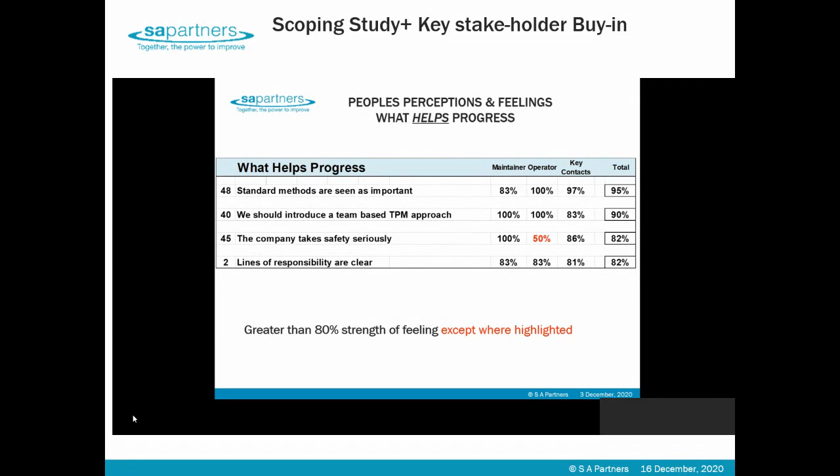The other thing we can do on the next slide is pull out that 7 of the 28 statements show how that individual feels treated, another 7 how the team works, another 7 how the management works, and the final 7 how the company works. The lower the score, the better in this, and anything above 40 represents an opportunity.

So it's clear here that TPM philosophy will most certainly help and address the high ratings of how the team works, which is universally accepted there. And going back to that slide, the management works not as well as it thinks it does, 28% there. But it's not to drive a wedge, it's a true honesty of where we are.

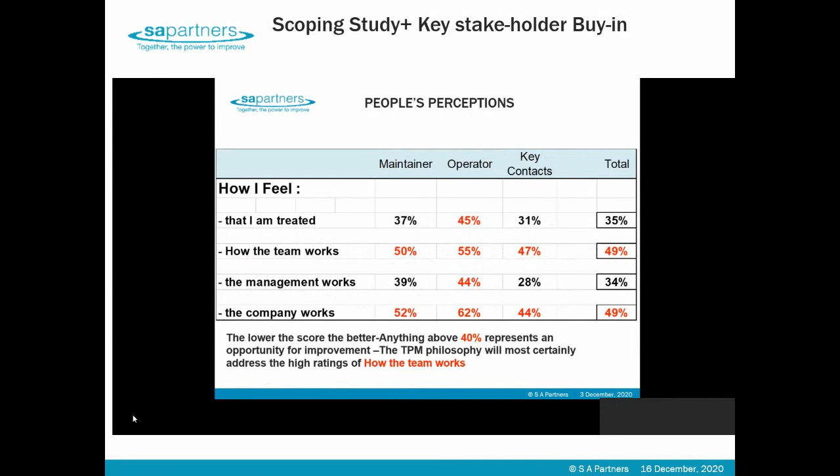We need accurate data we can trust on the OEE, downtime and quality for starters. We need a balanced set of KPIs. We need to continue to get everyone more engaged, keep going with the morale improvements we have. And this one I love: let's take the machines and start running them rather than letting the machines run us. 12-hour shift working is not working particularly well, and so on.

So some really good insights, improved engagement of the area. Just to summarize those perception results, what it showed is 60% feel participative management style is lagging behind the actual willingness to be involved. In other words, they're positioned to the left of that diagonal, but 60% feel encouraged.

And the TPM program will directly address 4 of the top perceived hinderers. Initially, it may well add to the top hinderer, which said we suffer from too many initiatives that become the flavour of the month. But most feel that the availability of the right spares at the right time is a major issue, and cross-departmental communications can be understood better. And most want TPM to be implemented, but the majority are concerned if management will sustain the commitment.

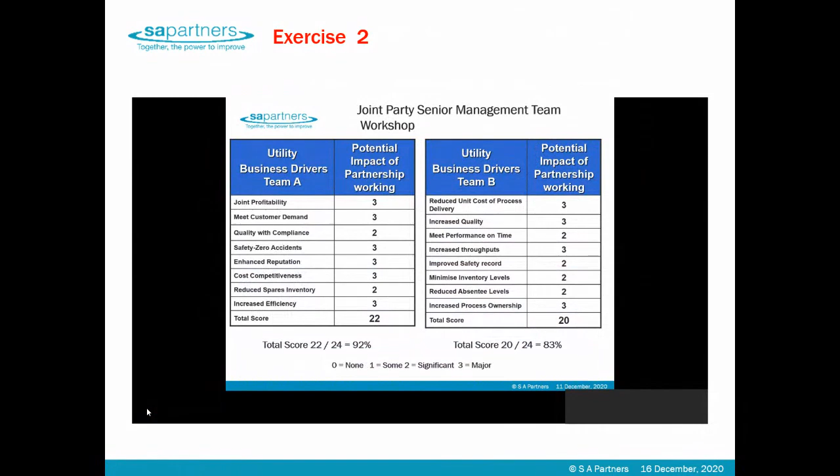So that last 55 minutes went really quickly. Let's just review our agenda, because we're now onto the wrap-up session of today's key learning points, some final thoughts, and evaluation of the workshop.